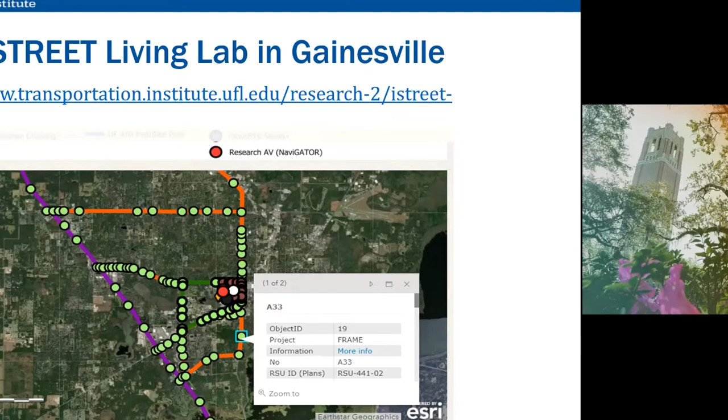And this map shows a little bit more information about the roadside units around the Gainesville area. We have about 150 around I-75 and around the city of Gainesville. We have roadside units at 13 signalized intersections, looking at 7 mid-block crossings, specifically addressing issues for connectivity with pedestrians. We also have applications related to signal control optimization, and we have about 60 connected vehicles.

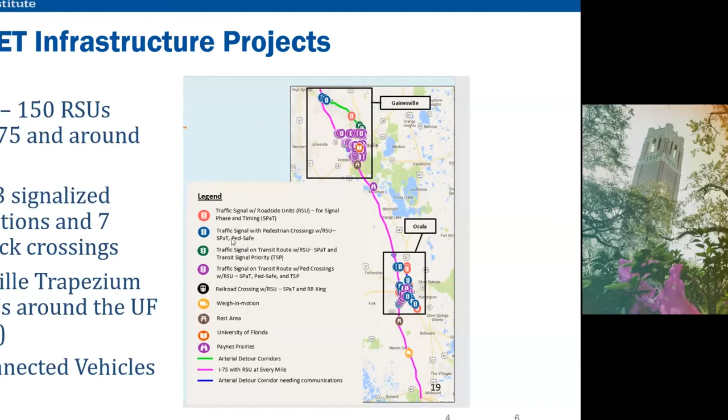The vast majority of them are with the UF fleet, and therefore the objective there was to make sure that we have multiple vehicles in one location. So the area of Gainesville is more contained than your typical metropolitan area, so 60 vehicles go a long way to have multiple vehicles at one location. There are several vehicles that belong to the city of Gainesville and some for FDOT.

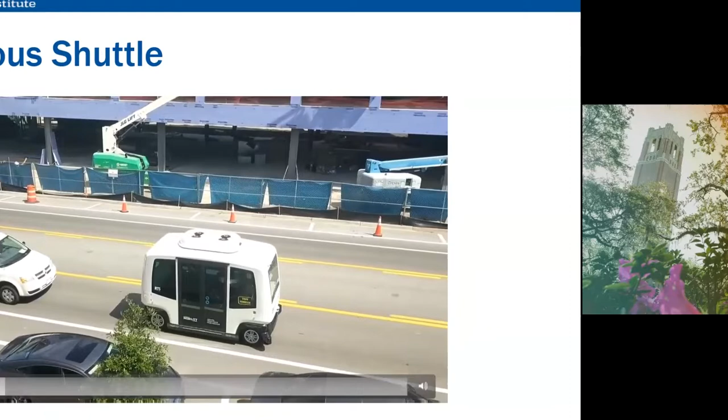One of the applications is an autonomous shuttle, which runs in the downtown area. The video here shows the shuttle when it was mapping the route, and you see how the shuttle was getting ready to pull over and how it stopped when the bicyclist went through.

The shuttle is now in the second phase of operation, running through the downtown Gainesville area, going through a traffic signal. We work closely with our industry partners to make sure the vehicle was also receiving signal information, so we're able to coordinate between the infrastructure and the vehicle.

One of the studies we've been doing with autonomous shuttles, shown here in Lake Nona close to the Orlando area, is to understand how the vehicle moves and extract information that helps us model its movement. The reason is that once we know how the vehicle and vehicles around it move, we can model it in simulation and evaluate the impacts in other locations.

So that has been one of the primary objectives for our data collection in Lake Nona.

We've also looked at traveler perceptions, how drivers react to the shuttle, how travelers generally react, and we did a before-after survey. The good news is once people get exposed to the autonomous shuttle technology and are able to take the shuttle, they feel much more comfortable with autonomy, so the perception becomes much more positive.

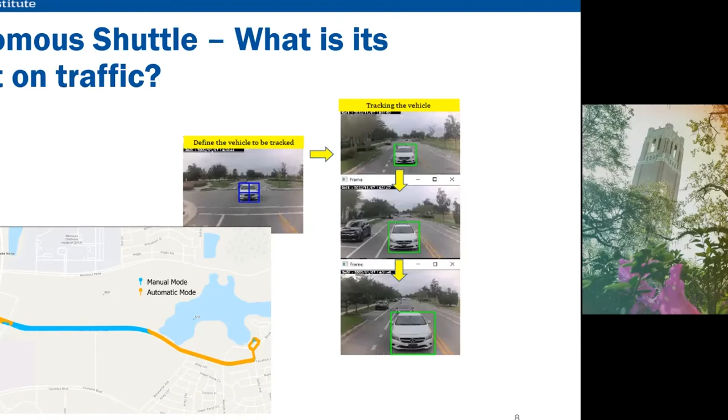On the negative side, drivers following the shuttle get really annoyed with the low speeds, and that's an artifact of the technology. Right now the speed of the shuttle is relatively slow, so it's important for others contemplating a deployment to consider how other traffic around it will react, because one observation was that vehicles following the shuttle were passing illegally, from the opposing direction when they were not supposed to. So these are things to watch for with autonomous shuttles.

One of our applications along I-STREET, an intersection on campus, is to provide optimal trajectories to vehicles that are able to receive them, and at the same time coordinate signal control.

What the video is showing is the optimal trajectories that we send to the vehicles versus the type of trajectory the vehicle is able to follow. We developed algorithms that allow us to maximize throughput and minimize travel time by controlling the autonomous vehicles, because they can receive a trajectory and execute it exactly as it is sent to them.

We also developed an app that allows a connected vehicle or even a conventional vehicle to follow speed guidance and get to the stop bar at the maximum speed at the minimum headway, which allows us to maximize throughput.

I wanted to quickly show a visualization example in this video. The top shows what happens with autonomous vehicles, the bottom with conventional vehicles. What we did here is change the trajectories of the autonomous vehicles to create gaps for traffic coming on from the ramp.

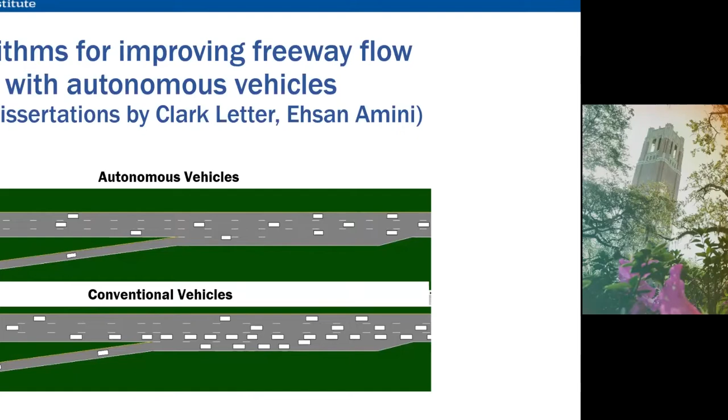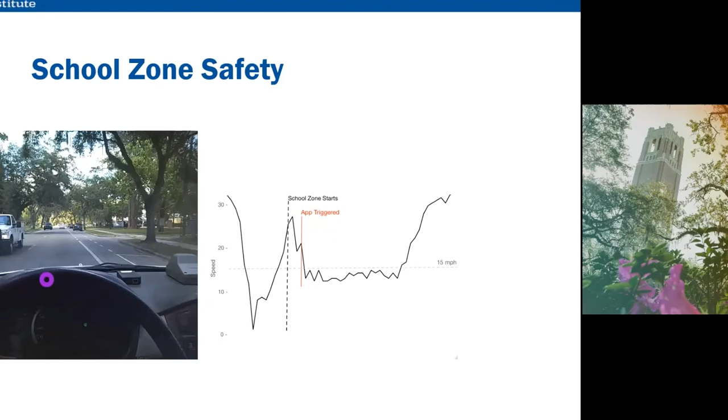Another project has been to provide warnings to drivers about the location of school zones and bicyclists. We've used eye tracking technology to see where the driver was looking when they received that type of warning, another application for connected vehicles. The experiments have shown significant improvement with specific auditory and visual cues for the driver, which is promising for safety.

As I said, we have a data analytics interface which assembles data from the more than 30 research projects that are ongoing or completed. I just covered just a few of those, but we have data coming in from several locations across Florida. And as we have additional connected vehicle deployments across Florida, we expect that database will increase. So we're working with our faculty in computer science to put that together.

As I close, I just wanted to highlight some of the challenges with the I-STREET Living Lab. First of all, implementation is much more complex than theory or simulation. The issues we run into include sensing accuracy, location of vehicles and so on, reliability of the equipment, accessibility of data from different partners, because we're bringing in several different industry partners, and the data we need for specific applications are not always available. There's also the coordination among multiple diverse partners, from public agencies to private industry, and generally the complexity of the system when we have humans in the loop.

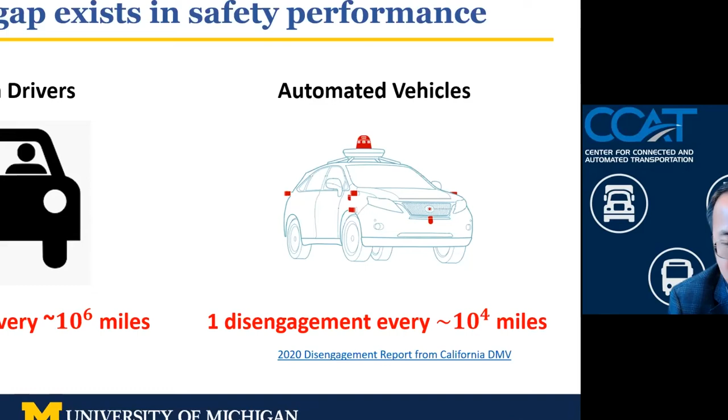So why does the safety gap still exist after so much investment? In my opinion, I think we have two grand technical challenges for automated vehicles.

The first one is what I call the curse of dimensionality. This is really caused by the complexity of the driving environment. The driving environment could be so complex because of different weather conditions, different road infrastructures, and different road users, and each of the road users has different behavior characteristics as well. If you combine all these together, the driving environment could be very complex. But the good news is that in the last 10 years, deep learning models have been developed and utilized to handle these complex driving environments. That's why people were so bullish about 5 years ago that we might have mass production of automated vehicles by 2020.

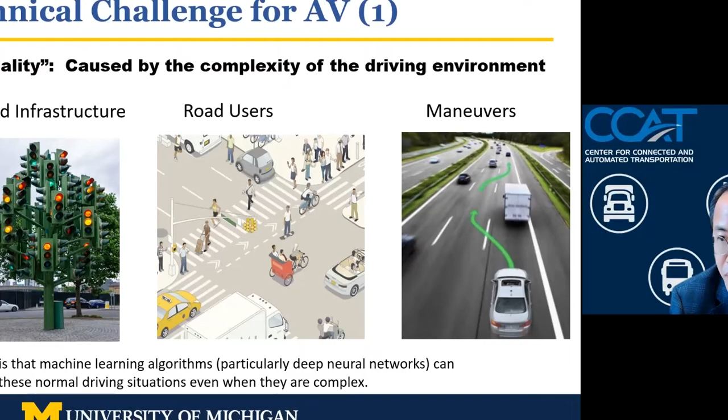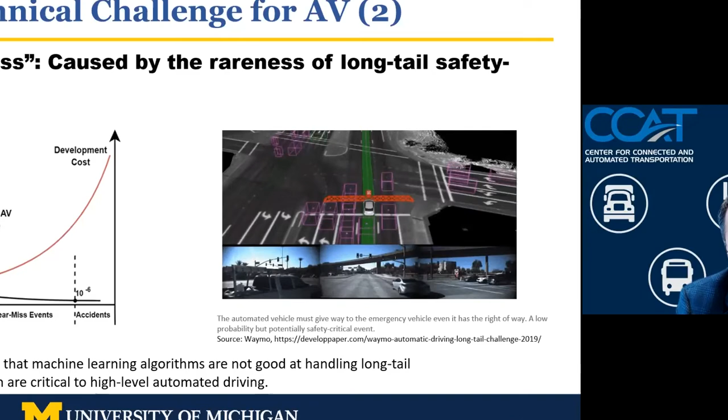The figure shows the current state of the art automated vehicle performance. There's still quite a bit of distance between current state of art automated vehicles versus human drivers in terms of safety performance. On the other hand, if you look at development cost for automated vehicles to handle safety critical events, the probability is low for this type of event, but the development cost to handle this situation increases exponentially. So it's not easy to handle this type of event, and that's why we don't really have commercially available highly automated vehicles yet.

So what do we do at the University of Michigan to help address these two challenges for automated vehicles? One thing related to addressing the challenge of the curse of rareness is to provide data from the roadside to complement the onboard sensors, to reduce corner cases or low probability safety critical events. That's why we started this smart intersection project last year.

In this project, we will equip about 21 intersections in the city of Ann Arbor, and each intersection will have a number of sensors that detect, track, and predict object locations and trajectories, and provide that information through sensor data sharing messages to automated vehicles. Hopefully we can reduce these unexpected situations for automated vehicles to accelerate automated vehicle deployment.

So the goal for this project is to develop an infrastructure assisted cooperative driving automation testbed, so that automated vehicle developers can utilize this testbed to test their automated vehicles. A number of leading industry companies are working with us on this project.

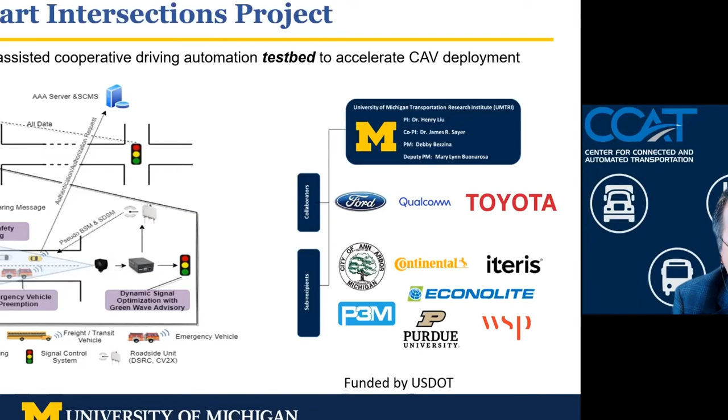Part of this project is that we have instrumented a roundabout in the city of Ann Arbor. If you play the video, on this roundabout there are 4 GridSmart cameras, 4 FLIR thermal cameras, and 2 Econolite IQ scan radars.

I just showed you these GridSmart cameras. We developed object detection and tracking algorithms, and then also developed trajectory prediction algorithms, and superimposed these detected objects on the maps on the right-hand side.

The green balloon associated with each individual vehicle is essentially the predicted trajectory for the next 2 seconds. When the balloon is bigger, it means the variance for that prediction is bigger too. This is a roundabout in the city of Ann Arbor across State Street and Ellsworth Road. This paper is going to be presented at the International Conference for Robotics and Automation this year.

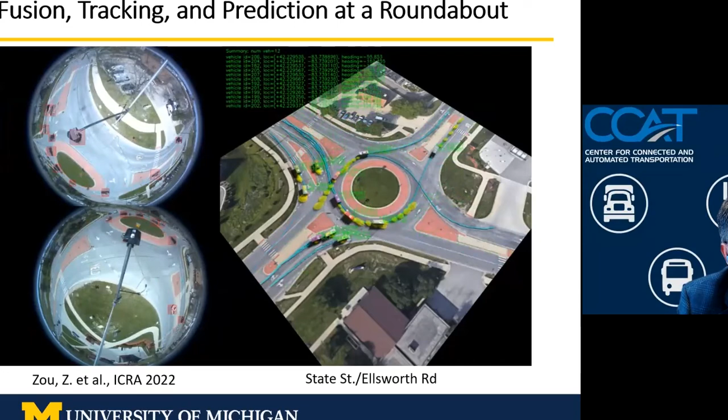Just for your interest, I want to show you 2 of these interesting events. In 3 months, we identified 15 crashes at this roundabout, and about 210 near misses at the roundabout as well. The one I want to show you on the left-hand side is a crash that occurred last September. As you can see, the arrow point is where the crash occurs.

That's because one of the vehicles, actually the outer lane vehicle, wasn't supposed to do the left turn, but they did the left turn, and the inner lane vehicle wanted to get out, and that's why they got the right angle crash. On the right-hand side video, at a similar location, you will see a near miss event. It's not a crash, but a near miss.

So a number of these events have been identified and collected and stored in our database. We're looking into these events and trying to learn from these safety critical events to see how we can design our planning modules to avoid this type of situation.

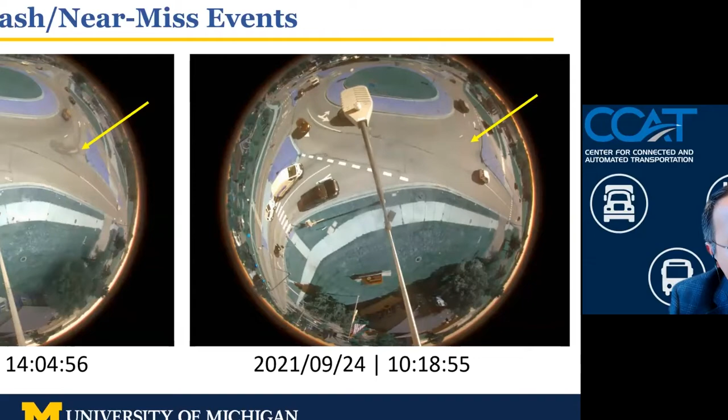The next project we're working on at the University of Michigan is to utilize M-City as a test track and develop our mock on-road test. It's well known that public on-road testing is necessary, but it's also very inefficient because it needs billions of miles to certify the safety performance of automated vehicles.

So what we do is utilize our closed test track at M-City, but complement that test track with augmented reality, meaning we use simulated vehicles as background vehicles to supplement the physical facility that the automated vehicle will run into, so we can use this simulation to generate all sorts of scenarios to accelerate testing and training. That's why we developed what we call a naturalistic and adversarial driving environment to supplement the test track.

One of the things I want to mention, particularly to transportation researchers, is that when we develop our augmented reality utilizing simulation models, we find out the current traffic simulation models, mostly developed for traffic flow analysis purposes, cannot be utilized for testing and training of automated vehicles.

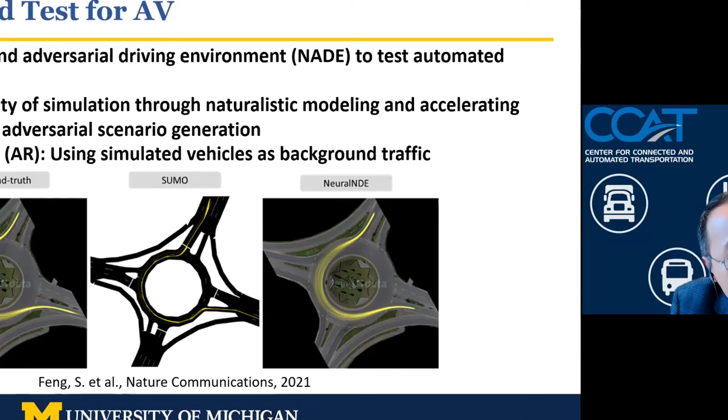If you play the video, this is what we do when we do the mock on-road test. On your left, this is a SUMO simulation. We replaced the internal model with our naturalistic driving environment simulator, and we still utilize the graphical user interface. The red car is essentially the real vehicle running in the test track. All the yellow cars are simulated background vehicles, and the information is being packaged into basic safety messages and broadcast within the physical facility so that the real vehicle under test can receive the background information.

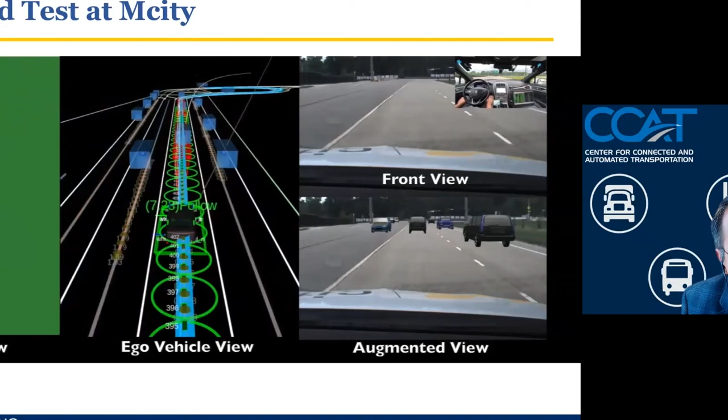On the right-hand side of the video, on the top, that's essentially the vehicle running within the test track, and you can see that's empty, but below that, there's a synthesized view of this vehicle, because we're providing the simulated vehicle information to the automated vehicle as well. In the middle, that's from the ROS visualization tools. You can see the black car is the automated vehicle under test. All these boxes are simulated vehicles fed to the automated vehicle so that you can generate different types of scenarios and challenge the automated vehicle to see how they react.

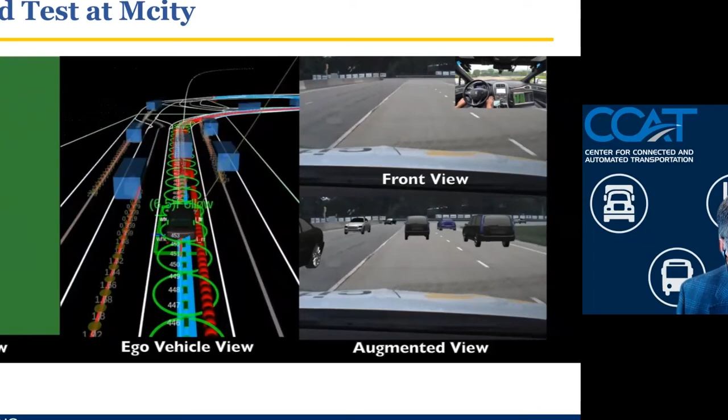So these are the two projects I briefly discussed. If you go to the next slide...

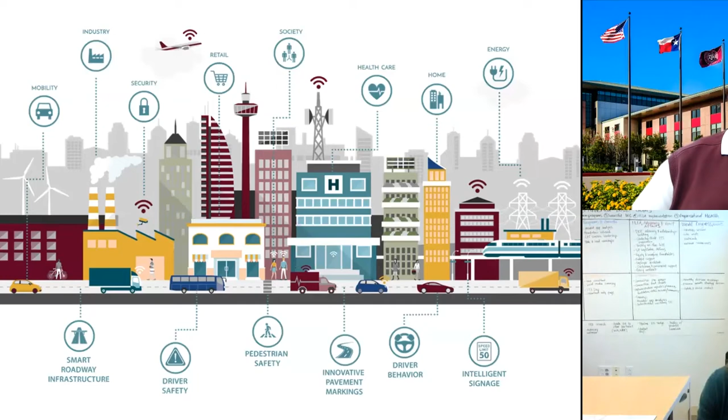There have already been some really interesting questions through the Q&A function. I want to appreciate our colleagues for taking the time to answer them. I think the visuals are so powerful, Greg and Henry and Lily, in understanding both some of the challenges we're facing, but some of the amazing progress your institutions are advancing.

We've had several questions from our audience, and I'm going to start with one from the Q&A box, a follow-up question to Henry. Henry, could you talk a little bit more about the challenges and differences you're seeing in that traffic flow model and the augmented reality simulations? The audience member is asking, can you explain your hypotheses about why there's such a difference between real world scenarios and the simulated scenarios? Is it maybe a difference in car following behavior or lateral trajectories? Could you speak a little bit about that?

Yeah, that's a great question. I think one of the difficulties we're facing for testing and training automated vehicles is particularly for these corner cases. The traditional traffic flow models, in traditional traffic simulators, are all based upon car following models, lane changing models, and gap acceptance models, and these are developed for the purpose of analyzing traffic flow, the collective behavior of traffic. But when we like to do testing and evaluation of automated vehicles, we're really focusing on individual vehicle behavior, particularly for these corner cases.